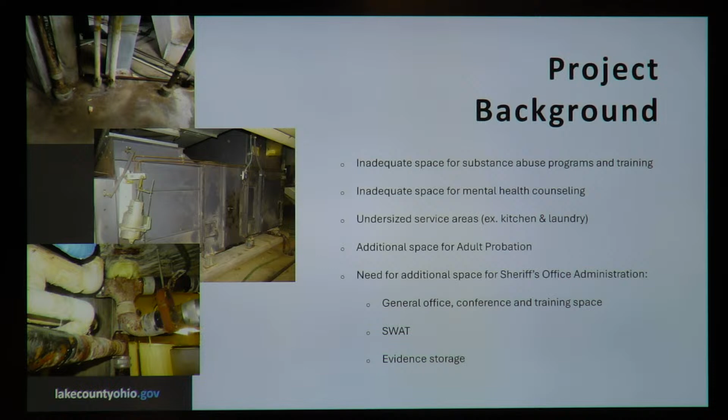So we're looking forward to that. Additional need for adult probation, Chief Barry and his needs and the growth of his agency and what they need to provide services to the community. We think about the jail as the hardened facility, but what I've learned the past couple years spending more time at the sheriff's office is what I'll call the soft side - just the general office space, the lack of flexibility, lack of conference rooms, training areas for SWAT, evidence storage, and so on. It just does not meet today's standards.

Some more things that we know, and we've talked about this ad nauseam the past decade. We've had 3 major studies completed, and I won't get into the weeds on the results because we know where we're going. We had one completed in 2014, a facade evaluation in 2018, which Commissioner Hamercheck is very familiar with, and then we took another peek in 2019. Basically, we know the jail requires millions of dollars in renovations, and it needs to be replaced. Most of the mechanical systems are at the end of life, and renovating a jail that is often full just does not make fiscal sense over the long term.

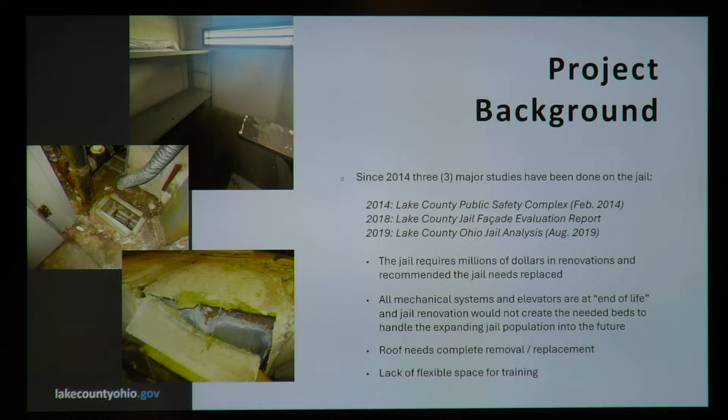So I'll spend a few minutes on the project planning process. I think this is very important to understand the diligent nature by which we've taken thus far. As I noted, we've been working on this for the better part of 10 years, but things really kicked into gear in 2021 when the commissioners selected project management consultants to act as an owner's rep for the county, led by Jeffrey Applebaum, who's actually a Lake County resident. PMC came on board in the summer of 2021.

In some early conversations, we talked about how we're going to deliver this project. We chose what's called Bridging Design Build. I think a lot of folks here in the county are familiar with the traditional method by which we build projects - I'll use a sewer line for example, where Randy's team or a consultant will design a water line, give a cost estimate, put that out on the street for 30 days to bid it, and then every Wednesday at 11 a.m., Jen and Kathy will open bid documents, and typically the award goes to the lowest and/or most qualified bidder. That delivery method is not the preferred method on a project of this scale and scope.

So we chose the Bridging Design Build, which essentially, and I'll expand upon that, allows our architects and engineers who are designing the building to be teamed up early in the process with the guys and gals who will be swinging hammers early on, as opposed to waiting. So I'll expand upon what Gilbane is doing with our designers here in a moment.

Step 2 was bringing on the architect. That process began in 2021. They are responsible for the program, the schematic design, and the detailed design, which I'll expand upon. The third step, which happened last November, was bringing on the design build team, which is essentially the contractor. The design build team is responsible for finalizing the construction documents, which most of us would call blueprints, and then issuing what's called the final GMP, Guaranteed Maximum Price. That GMP contract will be forthcoming later this summer into the fall.

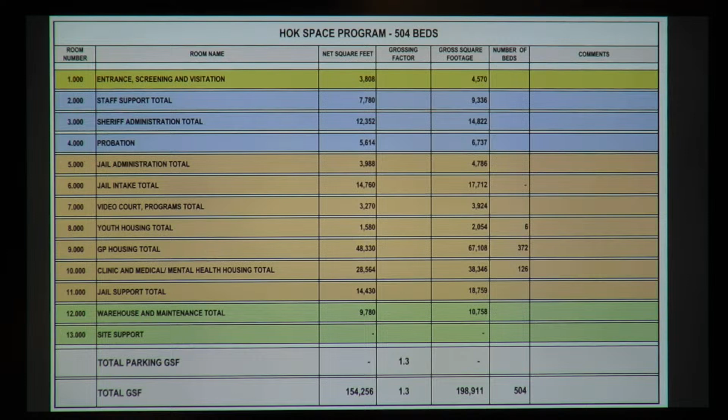The example of how much square footage we need for copy area, how many square feet we need for the conference room, evidence storage, drug evidence - that's the level of detail that HOK and the Sheriff's Office got into during the program.

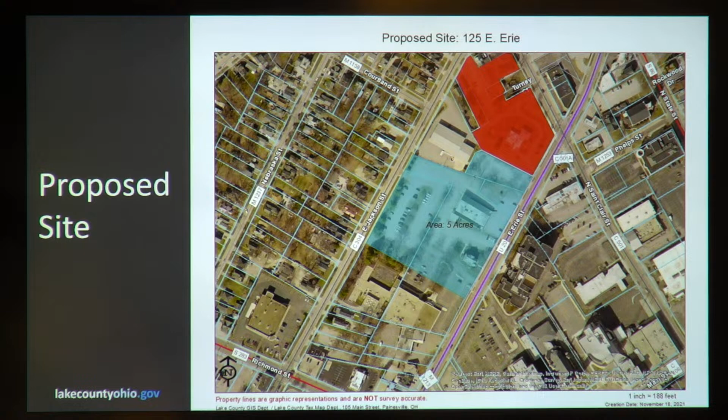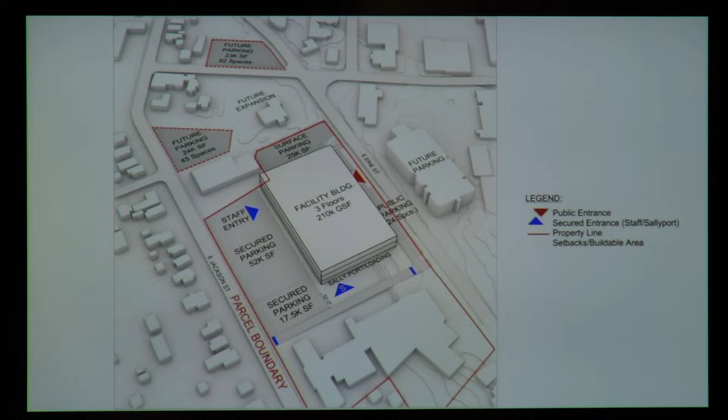As we concluded the program, we get into this rough order of magnitude cost. So let's put some timeline together - COVID 2020, 2021, this process is in '22. I would argue we're kind of coming out of COVID, but the construction market was very fluid at that point in time, still is. So we had the impact of the general market - what did the supply chain look like?

Escalation and inflation, we're still dealing with that. Labor costs, and what is the value of time? So the deliverable in the program was a budget at 200,000 square feet of about $171 million. That was our first glance at 200,000 square feet, plus or minus 3 stories, at about $171, $172 million.

We then proceed to schematic design. So we're in the second, third inning of the game, and here things are starting to take some shape - the building maybe is starting to come out of the ground.

We are planning and designing ad nauseum floor plans, site circulation, landscaping, food and laundry layouts, central utility plant. Mark and Paul cannot be here.

Maintaining and working on the infrastructure, Commissioner Hamercheck knows this, is a pain in the tail in that current building. This new building - it's not standalone, but will have a central utility plant where all of the major mechanicals will be located. Security, both in and out of the jail - the sheriff's team spent a lot of time on that.

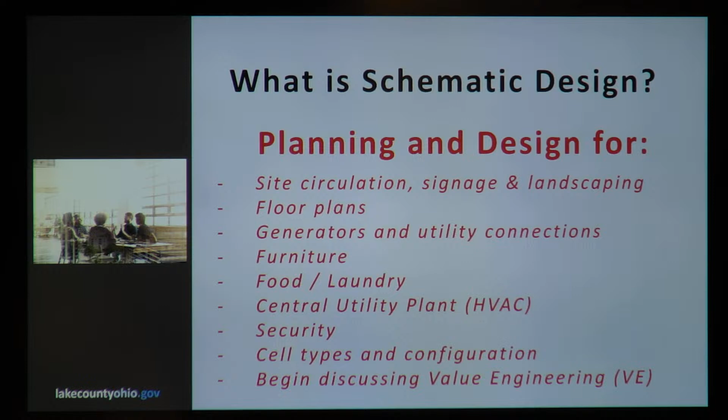So some of the deliverables in a program. We had Excel spreadsheets, and now the designers are taking those spreadsheets and putting each department of the sheriff's office into a block, starting to stack those departments based on a square footage standpoint.

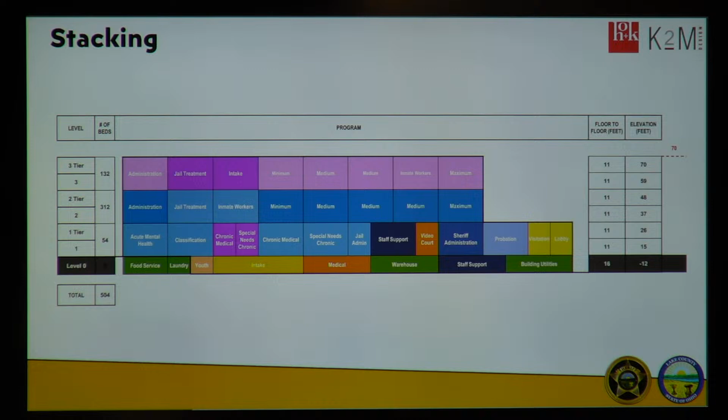This is another example of going from a spreadsheet to now we're starting to see this thing go live. This is a detailed sheet of what's called level 0. I quite frankly don't know why we don't call it the basement. The lingo started at level 0 two years ago and we've stuck with it.

This is a slide that takes the blocks, puts them on just a piece of paper and looks at adjacencies. For example, what you see on this particular slide are food service, the sheriff's warehouse, quartermaster, evidence, staff, and fitness. Where should those particular uses go on level 0?

These building blocks were picked up and moved a number of times during the schematic design. And this exercise also occurred on floors 1, 2, and 3.

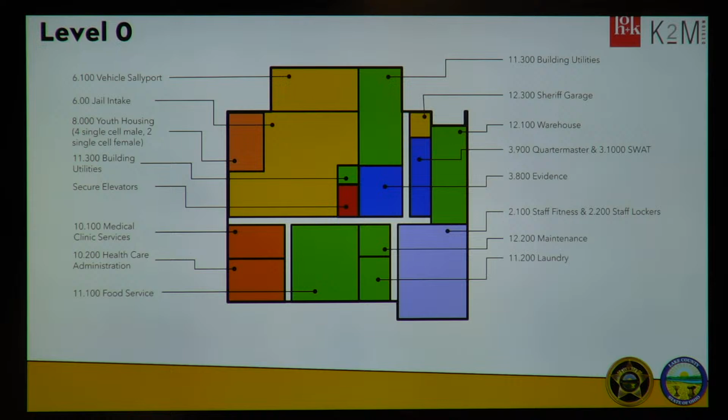This is where I'm going to just take a pause in the presentation and briefly talk about parking. It is probably one of my number one complaints from employees. I have a different approach with parking. Parking will be a challenge over the next 3 years, but we are in a downtown urban core and we have plenty of parking. It's just not where people want.

I would respectfully ask that folks and agencies bear with us. We're going to supply some additional parking down the road, but just my quick editorial comment that there is plenty of parking in the downtown area. The entire commissioner staff walked for 3 years during the construction of this building. I'll have future correspondence on how we're going to address parking down the road. So I digress there a little bit.

Continuing along on other variables that were examined. This doesn't mean a lot, it didn't mean a lot to me when we started. I think one of the commissioners was in this meeting when we heard the words borrowed light. How do we get natural light into the building, and particularly the ranges for the inmates?

So they looked at all 4 cardinal directions at various elevations, sun angles, and so on, to maximize the amount of sunlight, i.e. borrowed light, into the building. Once again, just an example of the level of detail by which we were working.

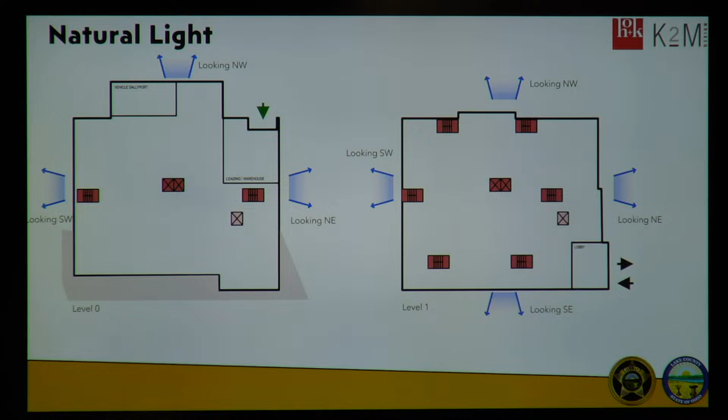Future proof, we take a look at should this building need to expand down the road. We looked at all 4 cardinal directions, north, south, east, and west, the pros and cons, opportunities, and constraints to a future expansion, probably when we are all long gone and no longer around here. I'm not going to spend a bunch of time on this particular slide, but the expansion plan in 50 years would be to plan east, or to the right, toward the Burger King.

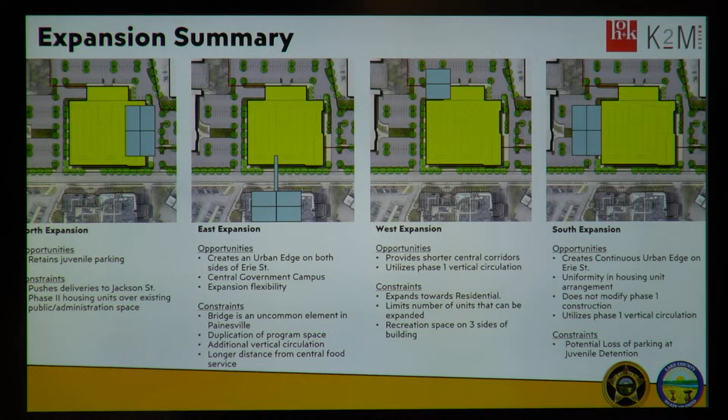Building character. I think we've heard a lot about how the current jail looks. Early on in the process we start having conversation of what should this thing look like, using the city's design standards, their zoning code, and working off some precedents, existing structures in the downtown civic core.

This particular building, our fabulous courthouses, City Hall, the churches, Morley Library—those were the precedents that we provided to the designers to give them kind of our guardrails, if you will, for what we want this facility to potentially look like.

Duplicating the existing structure was not an option. I heard that loud and clear from the commissioners from day one. This is a prominent civic justice representation, and it should be treated as such, with all due respect that it's taxpayer dollars. We start to see our first site plan.

The graphic here, the dark gray area is the footprint. We have juvenile court plan left. You start to see in the lime green some buffer areas, the parking starting to take shape. There's also a sheriff's garage, which is located by the Buildings and Grounds facility. So this is our first look at the layout on the real estate that we've acquired.

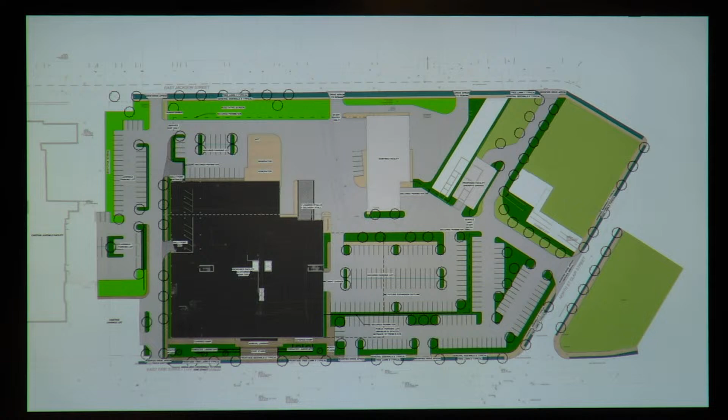We also see the first glimpse of this thing coming out of the ground, the first vertical iteration. This is literally the designers taking Sharpies and pens and listening to what we had to say as far as precedents in Morley Library and City Hall and architecture. So this is the first glimpse we received of what this building may look like.

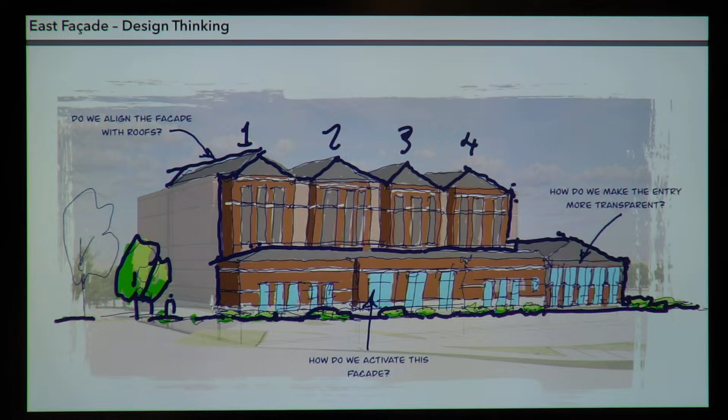That was followed during schematic design with our first computer rendering of the potential facility. And I think you will note right away, and I know we did as a design team, this does not scream jail.

This has that civic presence of a library or a non-secure facility when indeed it is very secure. And finally, the schematic design ends with a budget. So this was the 100% schematic design budget provided, this was last fall, the fall of 2023. So here we can go right down to the bottom line, because that's what we all do, and we see, oh man, we're now at $217 million.

A couple reasons for that. As we work through finalizing the program and into schematic design, we realized, the sheriff realizes, there were additional spaces that we need now, and probably more importantly in the future. So we wanted to make sure that we programmed and designed for that in the schematic design.

Secondly, you will notice on this budget we have a 15% hard cost contingency. That is $25 million, which you will see in subsequent slides. As we progress through the design and engineering, we eliminate unknowns. When we eliminate unknowns, we can thereby reduce that contingency on the recommendation of our designers and our contractors.

So this particular schematic design budget in the fall of 2023 was about 217. This is all in. This is consulting costs. This is furniture. This is IT. This is bricks and mortar. You name it, this is baked into this number.

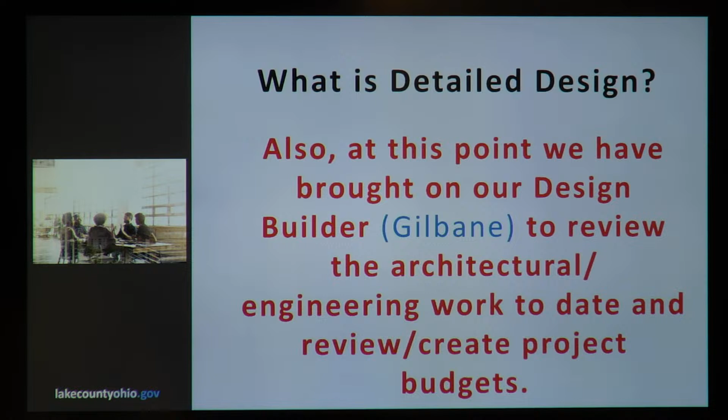A very significant point of detailed design is Gilbane is now at the table. At the end of 2023, we brought Gilbane on, and they've been in every meeting from paint colors to geotechnical analysis, like what type of foundation we're using. The beauty of having Gilbane at the table is they've built these before. A lot of times the designers and architects will have a vision, and Gilbane and their team can come in a respectful, professional manner and say, we don't think that's going to work, and here's why.

So you have both disciplines at the table at the same time during the detailed design. Some examples of what we're working on: we're really getting into the weeds on site circulation, pedestrian access, staff access, where deliveries are coming in. We worked with the city on bringing deliveries in off of North St. Clair, as opposed to Jackson and Erie Street.

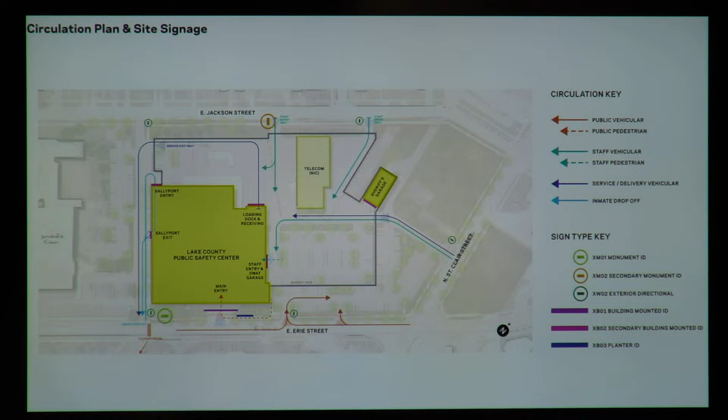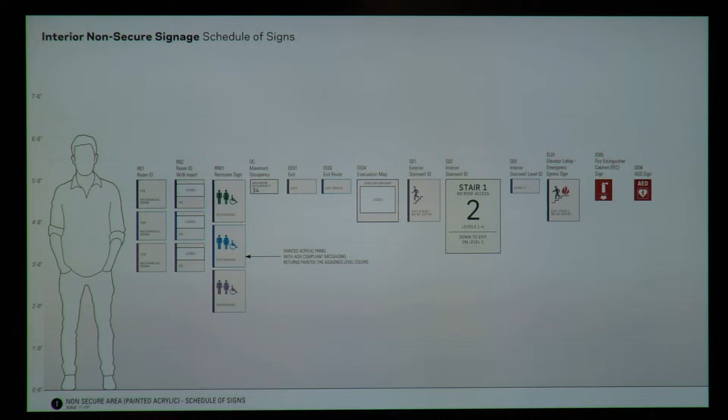I think we have a slide deck of about 100 images on our signage program. Not the sexiest, most fun part of the project, but we spent probably 5 hours in a planning meeting talking about signage, both interior and exterior. The image in front of you is just a schedule of signs on the interior of the facility. I quickly learned that this is a science. There's a means and methods to fonts, colors, size, how high these signs are located, to ensure that we have the best wayfinding in the sheriff's office.

The site plan begins to take shape. Now we are definitively seeing the paved areas. In this image in front of you, we've got the outline of the footprint, juvenile court parking. They will net out the same amount of parking. We will not lose any parking there. Secure parking for the sheriff's folks, secure parking at the rear.

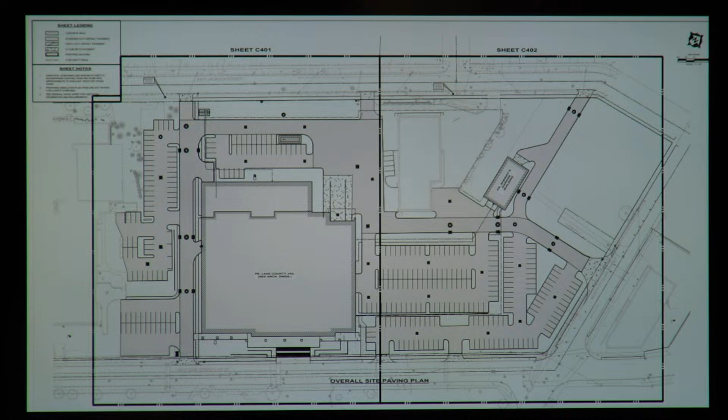A lot of lessons learned. Currently, you can walk right up to the sheriff's walls. That will no longer be an option. In the new facility, there'll be an 8-foot, hopefully an 8-foot—we have a variance request this evening—secure fence around the facility that'll have access control for sheriff's employees only or others who we give privileges to. We'll have public parking along the frontage of Erie Street, wrapping around Burger King, and also in some of the ancillary parcels that we've acquired on the footprint.

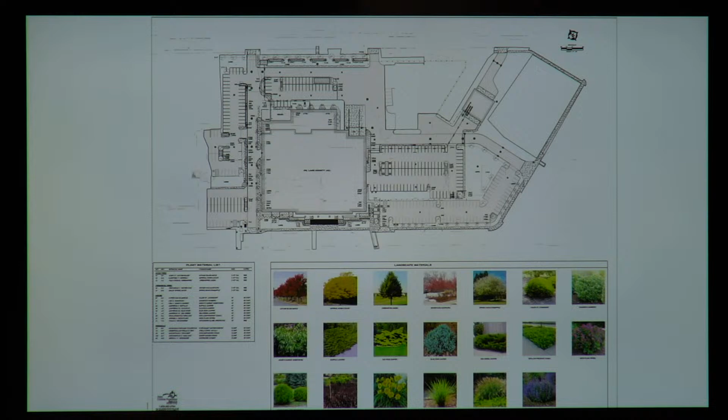And probably the fun part, most exciting—now this building is coming out of the ground. So the next few slides will show some renderings as they show today. We're at 3.5 stories, located directly across the street from the current jail. You see the sheriff's garage, a detached sheriff garage. The parking, we see the relationship to Telecom, juvenile court. This is kind of the main access corridor for the Sally Port and so on.

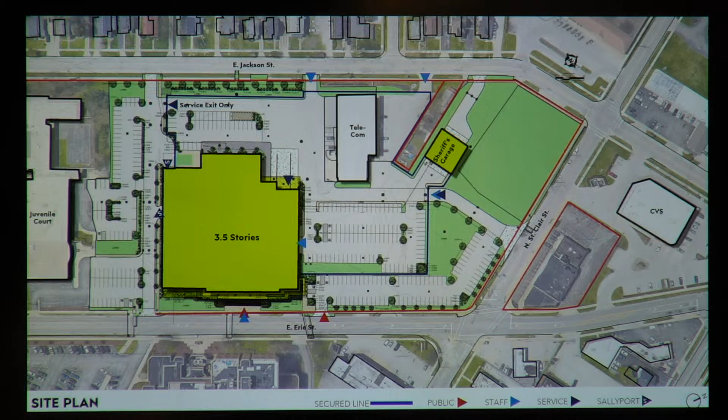Here's the site today, a bird's eye view, if you will. I hope everyone gets a visual of how the building, 240,000 square feet, will fit onto the site. Hard to see on this slide, but the red dotted line represents the county holdings as of today. Obviously, we also have acquired the Chicago Title Redmond building, which will be future parking.

Phase-wise, the front three—I've called them the former Ohio State University Extension Building, 125 East Erie Street, and Burger King—demolition will start in the next 30 days. Asbestos abatement is occurring as we speak right now. I want to also note our relationship and collaboration with the Land Bank, the board, and John Rogers. We are doing a 50-50 cost share on this demolition, so that's a huge help to the project budget.

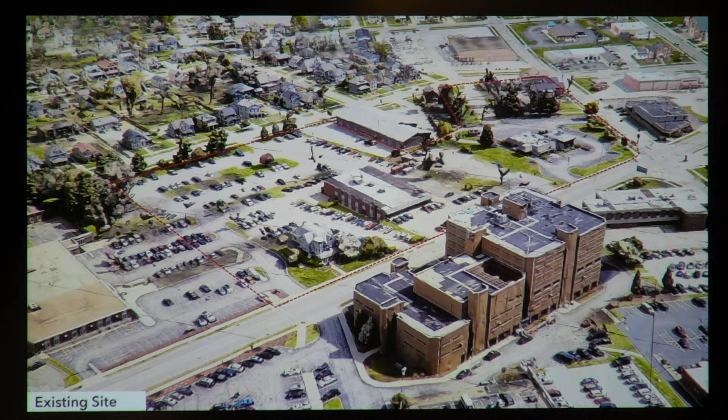This is what the structure will look like on site. You see the buildings are gone. We have a 3.5 story, 240,000 square foot structure. Sense of scale, a super Walmart's about 200,000 square feet, so you get a sense of scale. Obviously those are 1 story, this is 3 stories.

We get our first look at the perimeter fencing that I referenced for the sheriff's secured parking, kind of our Sally Port on plan left, ingress and egress, connecting Erie Road, Erie Street and Jackson Street. Quite frankly and honestly, we don't know what our parking, when we all net everything out, will we need the parking on the corner on some of the parcels we acquired at St. Clair and Jackson Street? We have that.

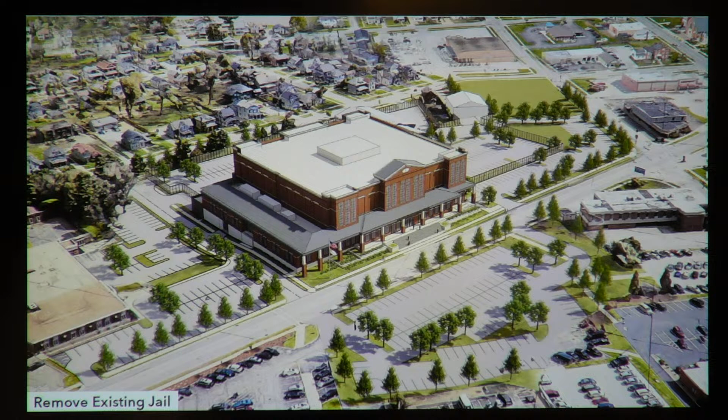We future-proofed ourselves, so time will tell how much parking we will really need. What happens when the jail is occupied? Sheriff's in there, inmates have been moved over. Well, the current jail is planned to be demolished. So this rendering shows the jail less the current jail. Right now, we've programmed that. It's about 121 additional public parking areas. To my previous comments about how much parking will we need, not sure yet. We're meeting the zoning code, but the takeaway is we will have plenty. We will have the ability to add.

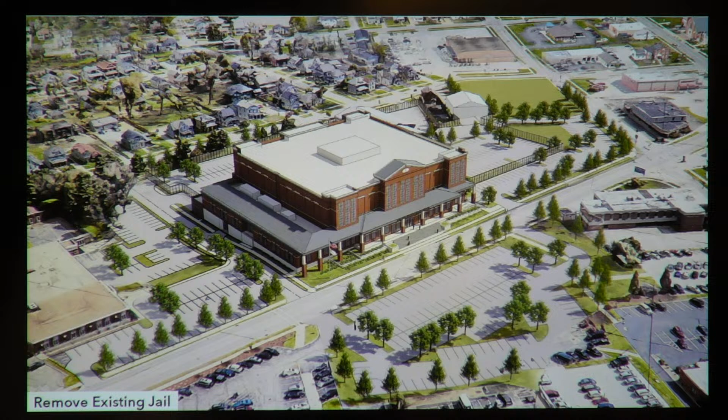We've had some great conversations with the city manager, Lake Tran, on is there a collaboration project anywhere in the downtown core to make sure that we have enough for our employees and our guests, and as the downtown continues to develop, additional parking for things like Party in the Park that's occurring this weekend.

So this is the fun part. This is a rendering. Let's imagine you're walking from Arby's towards the jail, the current facility. This is that bird's eye view southeast. I just want everyone to take a moment to hopefully appreciate the materiality of the structure, the change in plane. It's not one blank wall. We have window patterns, we have pillars.

What we've tried to do is we've tried to mimic some of the design elements of Morley, of City Hall, of our buildings with the bricks. You will notice in the main entry, kind of that sandstone look that we have here on the Nolan building.

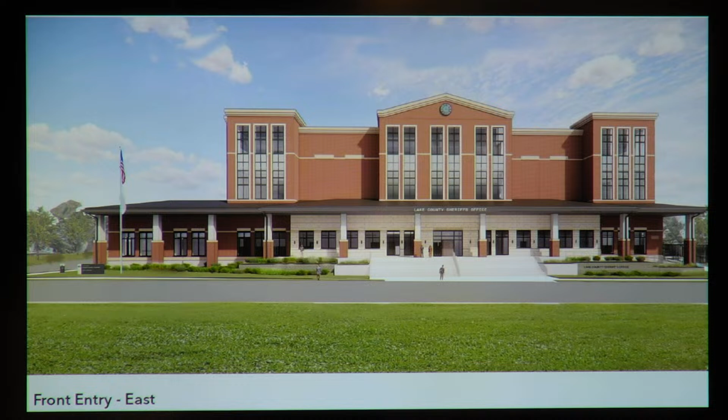The structure will be elevated on what's known as a plinth, and this image kind of gives a better feel of that. This is if the current sheriff's office is gone. You walk out of the door today, and this is what you will see. I don't think anyone in their right mind would argue that that's a jail.

I think it's a tremendous representation of a prominent civic structure. So here you get a sense, they've got some renderings of individuals here, a sense of scale, similar to our county courthouse, where you have to enter the steps and get that sense of place. We'll have our ADA requirements on the right side to make sure that we are an accommodating facility.

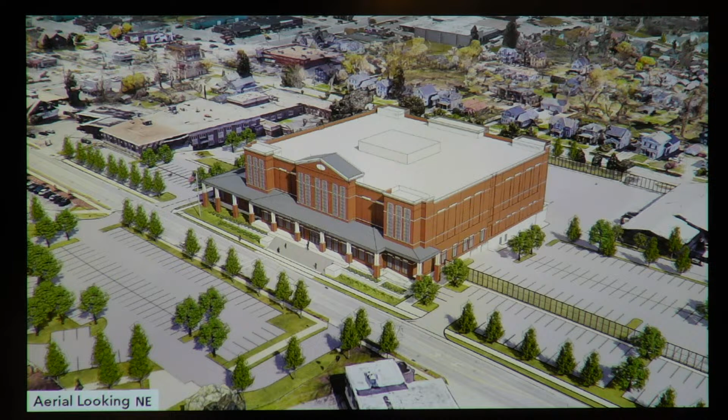Kind of take a drone view, if you will. This would be looking from, let's say, above the Conrad's building. As a matter of fact, the Conrad's is shown in the bottom of the image. This gives you a good sense of how it fits on the site and the surrounding residential neighborhood. You can see our buildings and grounds telecom facility on plan right.

This is a street view from Jackson Street, with appreciation and respect to the residential homes across Jackson Street. This will be an earthened berm and vegetated buffer. This is looking at the rear, and you get a sense of the secure fencing and the trees.

There's a whole cut sheet, or specification requirement, that the city has that we will meet to ensure the buffering requirements are met. It boggles my mind when I see tractor trailers today maneuvering through the current facility. We'll actually have loading docks for deliveries.

From an operational standpoint, I've learned from the sheriff's staff that maybe we won't need deliveries as frequent as we do now, because we're going to have ample freezer space, storage space, docks, and so on. From a scale perspective, there are some renderings with individuals here to get a sense of scale, and you'll notice we've incorporated the architectural design even in our central utility plant.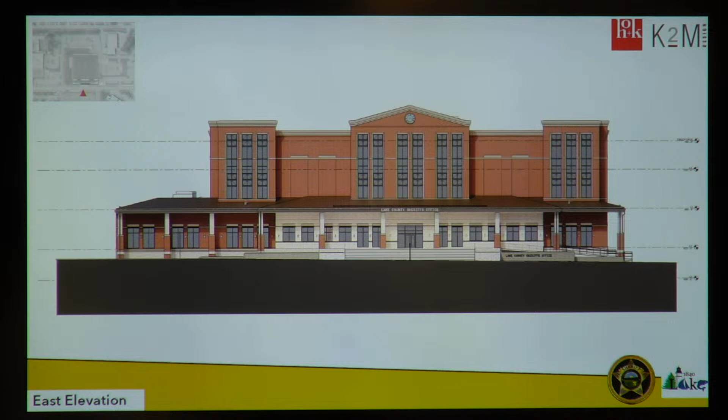The next four slides are basic elevations. We've seen these - this is the front facade. This is the side. If you're standing at Judge De Leon's Juvenile Justice Center, this is a good representation of the topography that we are taking.

This is Erie Street here on plan right. We're taking advantage of that change of grade, about 10 to 12 feet towards Jackson Street. This particular area will be where the Sally Port is. We will not have - those of you who are familiar with, on a busy morning - first responders and police officers backed up on Erie trying to get into this current Sally Port.

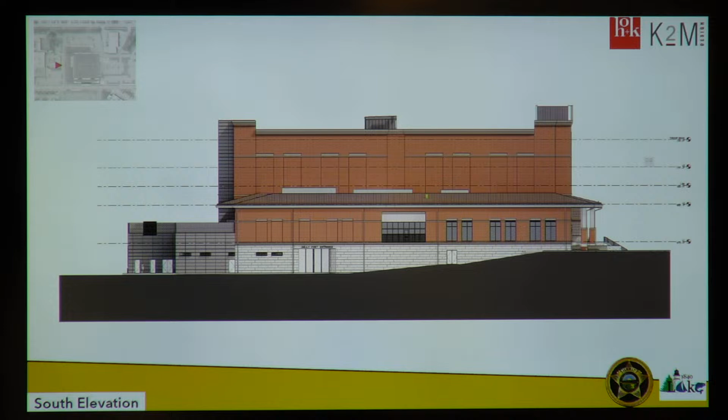This is the rear of the structure on Jackson Street. We've seen this. This is looking from the Burger King. Once again, you get a good sense of the change in elevation.

This is a pretty neat graphic. We'll actually be presenting this tonight at the Board of Zoning Appeals. The red dotted line across the top is a visual representation of the height of the current building, the current jail. The zoning code has a 45-foot height requirement, and we are well above that. There is a precedent with the current jail.

We'll use this as an exhibit tonight for our position statement for the variance request, and we'll also have our setback analysis off of Erie Street. We want this building to be tucked up as close as we can to Erie Street. Not only is that a good urban design principle, it also quite frankly gives us room to buffer off of Jackson Street.

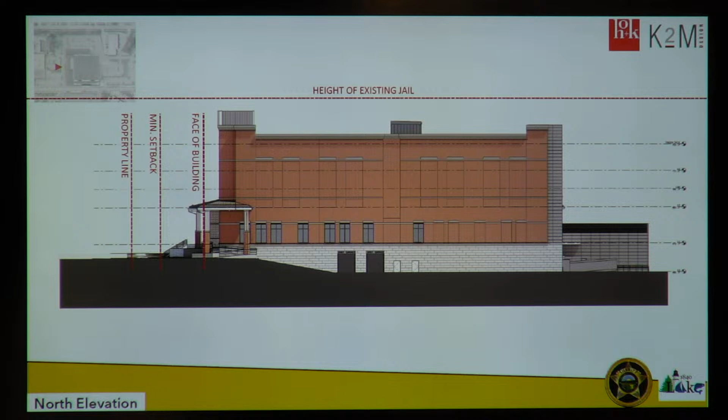Just a few more slides here. This is the level of detail that we're at in detailed design - this is materials. The designers physically shipped brick samples and glass samples to the sheriff's office for them to take out in the sun and see what they liked.

So we had to submit this to the City of Painesville. This has the manufacturer, the color of the brick, the tint of the glass, and so on. These may change a little bit as we finalize design, but all of these things were incorporated into our planning commission approval last week.

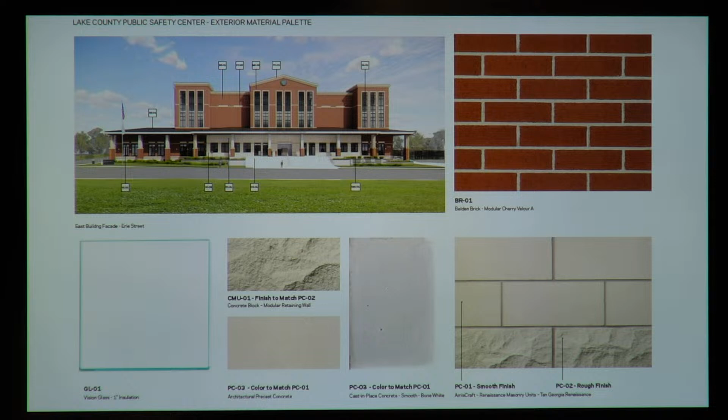So we've seen the building come out of the ground, and we've got a good handle on the site plan. Now we get our 50% design development budget. As I noted earlier, we're at the end of design development, but we only have the 50% estimate. We're anticipating a 100% estimate in the next week or so.

So now the building size hasn't changed, but we've got that number down. Because we've gone to about the 6th inning of the ball game, we've eliminated a number of the uncertainties. So we have the ability to reduce that hard cost contingency to 8%, which is still a healthy number of about $13 million. And we've kept our 5% contingency and will continue to do that.

So at this point in the game, with the contingency reductions and some of our value engineering, we've reduced the budget back down to $205 million, which is kind of our working number right now.

To that point, Joel, Zach, and I have been looking at what other areas in the budget may already be paid for and accounted for, and we're still working through that exercise. For example, the criteria architect line item, 5.6 million, has been budgeted for and essentially paid for. So there may be an opportunity as we gear ourselves toward GMP to remove that, because it's been paid for and accounted for, which is good news.

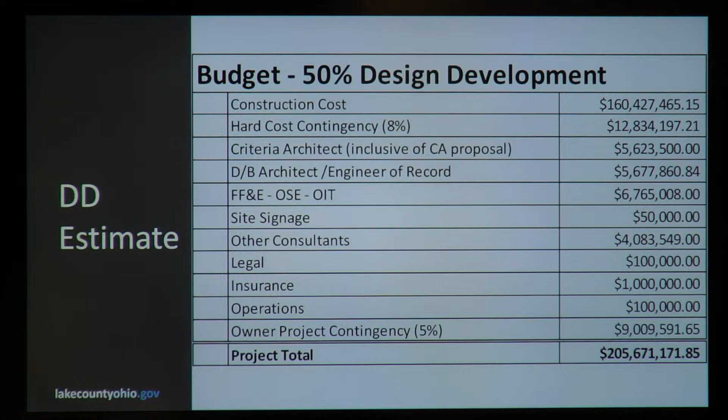Last two slides - I know you guys cannot read this. This is the timeline. The three questions I get are: when are you starting, when is it going to be done, and how much does it cost?

Right now we're in that $205 million range, and how are you paying for it - we'll discuss that. Right now we're in in-depth discussion and analysis on the financing plan, and we'll speak about that.

As of today, I had a call yesterday with Gilbane. We could probably see a construction fence go up in early to mid-November. Potential completion date at this point in time, and obviously we're still in the 6th or 7th inning of the game, is July 2027.

So we're looking at about a 3-year window. Included in that, we have to think about training for the sheriff's guys and gals, commissioning of all the equipment, HVACs, IT, access control, cameras, and so on. There's a lot of work that will occur when a lot of folks will think the building's done. Well, it may look like it's done, but we have to make sure it's running efficiently and all the operations are hitting the marks of the sheriff's office.

But right now, construction completion is slated for July of 2027. Now, what we learned in this particular building, and it's baked into this figure, is we are in Northeast Ohio, and winters can really slow down a project. They have baked in weather days on this, but if we have a good winter and we can get this thing dried in, maybe that timeline can be shortened a little bit.

What are our next steps? Well, we've completed the detailed design, I've talked about that, that is happening as we speak. We're working through our city-state approvals. Planning Commission last week, Board of Zoning Appeals tonight. Everything, Phase 2 documents have been submitted to the Ohio Department of Rehabilitation and Corrections. They have a whole internal approval process.

We are transitioning to our design build team. Essentially, HOK will go from the driver's seat to the passenger seat, and Gilbane will take the wheel with their team, which includes K2M, Lakeland Construction Group, and a number of other variables. When Gilbane takes the wheel, they'll be responsible for the construction documents, the CDs, so innings 7, 8, and 9, and ultimately issuing our guaranteed maximum price, our GMP. That'll be the large construction contract put forth before this board late summer and early fall.

Simultaneously, we will continue to have the conversation on early packages. Should we buy generators? Should we order the cells that'll be manufactured in the United States? And we'll continue the site demolition process, so logistically we're ready to go.

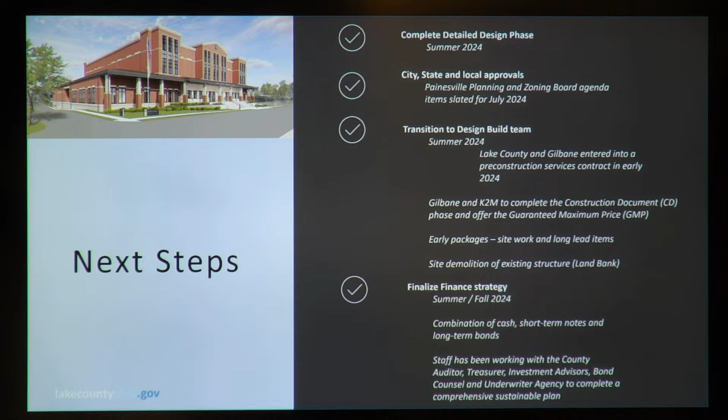We're confident that we've positioned ourselves in the best extent possible with our existing revenues. We're in a stable position. That said, this will only be able to be maintained on a team approach through hyper-conservative budgeting from here on out, and then a great team approach starting with the county commissioners and all of our elected officials and department heads. We have worked really hard, not only on the planning and design, but also on the financial strategy to finance the building and still effectively operate the county on a go-forward strategy. So that concludes my remarks.